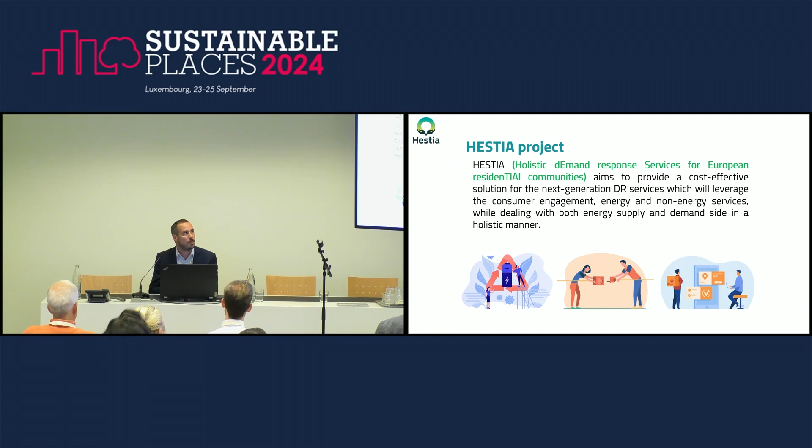I will speak about HESTIA, and I'm very glad to do it because it was a great consortium work. I think this was already discussed this morning, but HESTIA is an EU-funded project, and the aim of HESTIA was to develop solutions, in particular for demand response services, and in general solutions that are cost effective but also socially acceptable.

The 4 pillars from the beginning of HESTIA were to develop, as I said, a demand response cost-effective solution, because demand response, as Stefan said, is a revolution in the energy paradigm. Demand response means that each one of us in our household can contribute to the grid, to the stability of the grid, and to the energy world.

But it has to be cost-effective, because it's not an industrial cost. You have to have costs that are sustainable to develop solutions in each one of our households. The environmental impact, because all activities in HESTIA were done in order to promote the use of renewable energy, where possible PV plants, and in general to make a positive environmental impact, reducing energy consumption or shifting energy consumption in good time, depending on the nation, depending on regulation, depending on the grid status.

The economical benefits, because at the end, an economical benefit may be minimum, but has to be granted to make the change. And also demand response is a theme that is incentivized in these months and years all across Europe. So we have to check also, to start up this kind of activities, an economical benefit. And in general, the main economical benefit will be to reduce the energy consumption, even if it's not the only KPI to be seen, because it's important, but not all is the energy consumption from the grid.

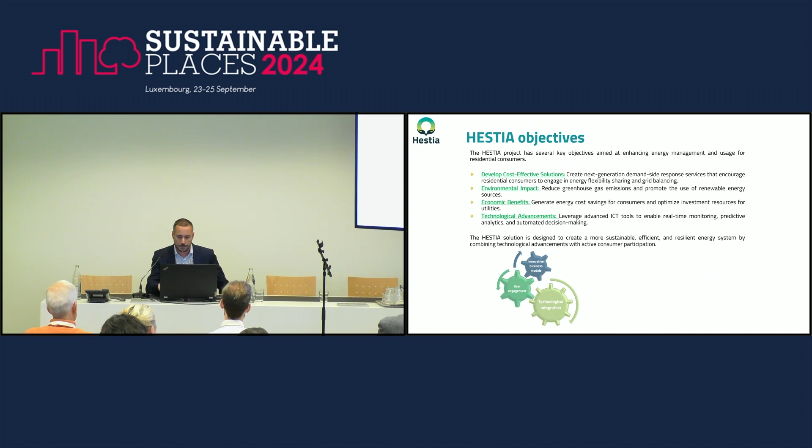As I said, the first part was to make an ICT integration, because we were a lot of members of the consortium, different technologies, different nations, so we had at first to equalize what was best in our solution, best in our nation, best in our technology, and then try to implement it depending on the pilot, depending on the case.

The user-centric approach: I don't want to speak too much, because this morning was very interesting about it, we should always have a user-centric approach. We tried to do it in HESTIA, but we could be more effective, it has to be said. All has to start from the user if we want to change the energy paradigm, as Stefan said. For this reason, there were 3 pilots in Italy, in France, and the Netherlands, and we started to engage the people in these 3 pilots in the early stage of the project.

Remuneration. The solution provided by HESTIA has a remuneration module, remuneration connected to the demand response actions that are central in this view. We have to say that it was tested in a theoretical way. The people were not physically remunerated, but the tool is ready, and in the Italian pilot it was tested.

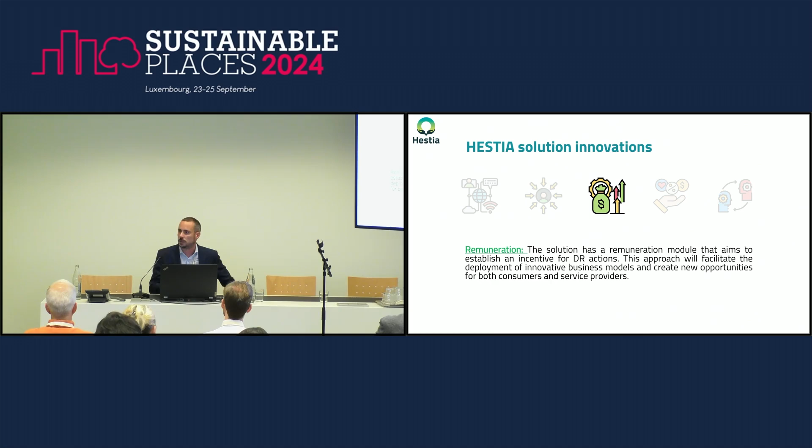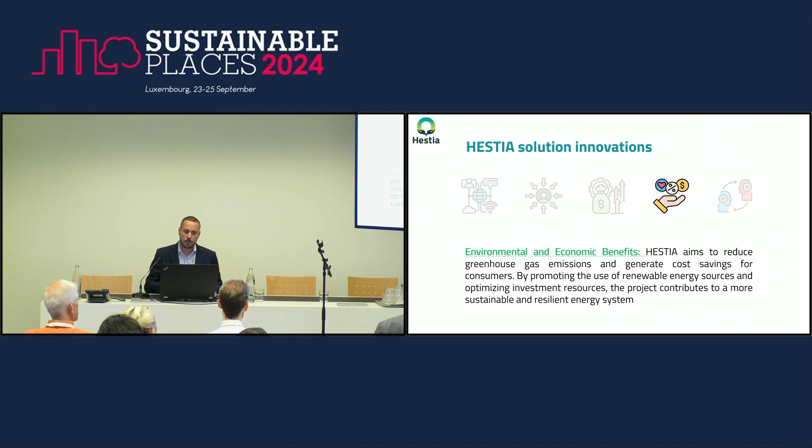About environmental and economic benefits, we can say that we promote the use of renewable energy, in particular PV plants. In many parts of the pilots they were already present, but not always well used, or there was no storage system. So we added the storage system, for example, in the Italian pilot. And so we can promote renewable energy and the conscious use of renewable energy, and in general, optimizing the consumption and the time of the consumption, we made incremental other environmental benefits.

One of the pillars of the project is to share these 2 worlds, the social and technological sides, and each one has to speak with the other to guarantee that this solution will be implemented or will be effective. So, as I said before, in the early stage of the project, people were involved. It was a little bit hard to keep people interested for years and years, because the HESTIA project had a forecasted length of 3 years, and will last 4 years because of the COVID period, which was very hard for pilot implementation. So it was very difficult and not always the best to keep the people engaged for 4 years.

About the pilots, as I said before, there was a pilot in Italy, in Berchidda. The municipality of Berchidda owns their distribution grid, so it was a little bit easier to develop demand response in this kind of sandbox. Camille Claudel in France, a big eco-district, with attention to shifting consumption out of the peak, the problem of the energy grid in France. So this was the main challenge of this pilot.

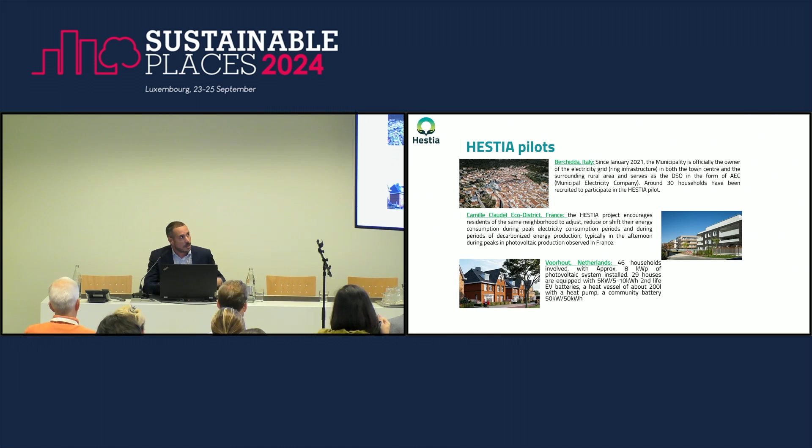And Voorhout in the Netherlands with second life battery storage, EV, electric vehicle batteries that were used for storage in the households, so a second life project. And also demand response arbitrage was thought about for this pilot. This is a graphical summary of HESTIA services.

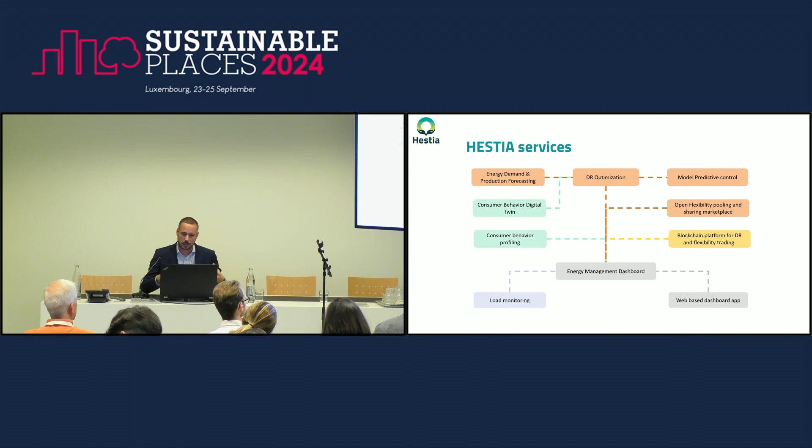As I said, a little bit more in depth, these are use cases. So what was really done in the pilot? In the Italian pilot, there was a shifting in electricity use to favorable moments and according to PV production, and also improved the management of the storage system that was manual, so it was not automatic, but it improved the sensibility of the people to use it in a more active way.

The Dutch pilot was used also to test the arbitrage, so basically to absorb from the grid in a certain period and to release in a more favorable period, and maximize the self-consumption in the Dutch pilot. Also, the French pilot, as I said before, was to shift the consumption out of the time frames that are very critical for the French grid.

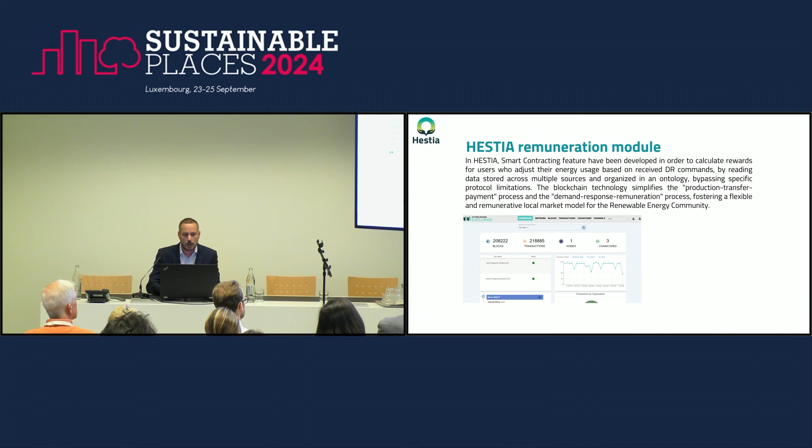Results. There were a lot of KPIs, but among the others, there was a 10% mean reduction in the consumption from the grid, more than 50% increase in self-consumption in the Italian pilot because of the storage system, as I said before, and more than 20% overall consumption reduction for the Dutch pilot, for the sensibility to have data and check our consumption.

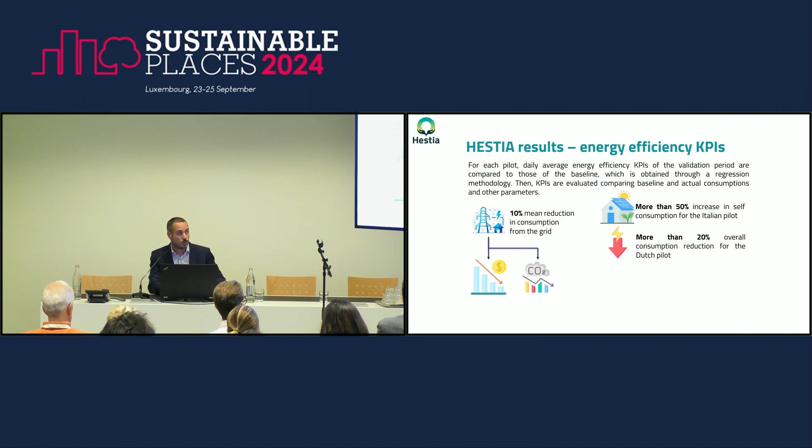Conclusions. In general, we can do some more. We can refine the model, refine the solution according to the feedback from the pilots and from the KPIs, which were a lot, 50. A lot of them are not calculable at this moment, so there is something else to be checked, but in the main KPIs, that are grid consumption, but not only this, the usage of the platform, the involvement of people, there is a lot of good feedback that will be implemented maybe in a future activity of the consortium after the conclusion of the EU-funded project.

Sorry. More than perfect, and you are right on time. You were very timely to say, okay, yes. Two minutes. I'm so sorry for that. The timekeeper, no, is a bad word. You have to. So maybe we will jump directly to a colleague from Sender, and like that, we will have the questions after the three presentations. So I will make some signs about the time sometimes.

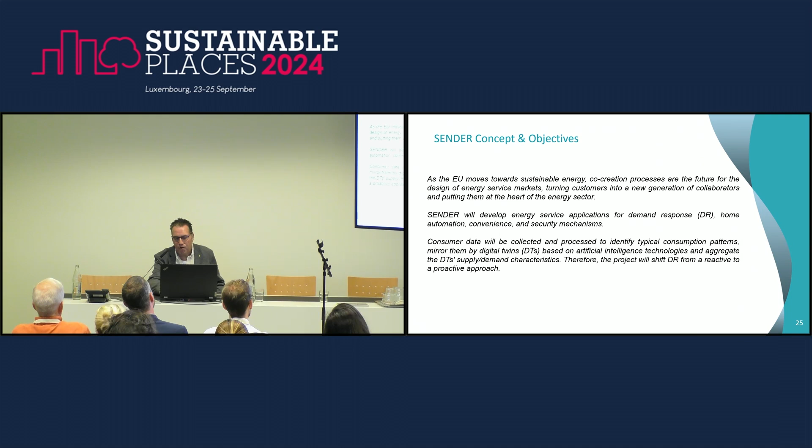However, the application was accepted, and we basically said we have a portfolio of technologies that we could implement, but the user will have the final say. So maybe that's just kind of introduction to the general project context. We have a wide European coverage with some 15 partners from 7 different European countries, and we have demonstration sites in Austria, Finland, and Spain.

If you look at the Sender system architecture, we follow certain reference architectures, and on the left-hand side we have the more consumer-centric approaches. On the right-hand side, the aggregator-related applications we can provide, and then in the lower side of the graph we outline certain technologies that we will use, like a hot water tank controller, home gateway, and so on.

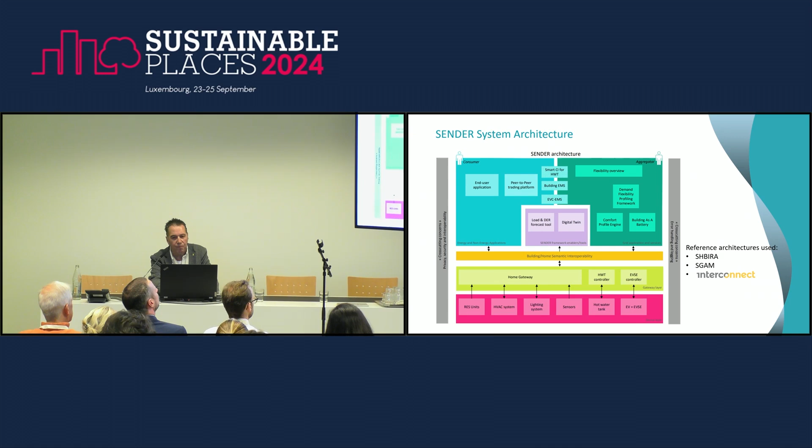And what I would like to do now is basically focus on the concrete technological implementations that we did, and that was on the one hand, consumer digital twin from our Greek partner Paragon, and they basically used this digital twin in the first step in the aeronautic industry, in order to forecast and also support the balancing of long-haul flights all over the world. And then they applied this kind of technology also to the Sender project to forecast the occupancy rate of buildings, which is quite an important input factor also for other technologies in the project.

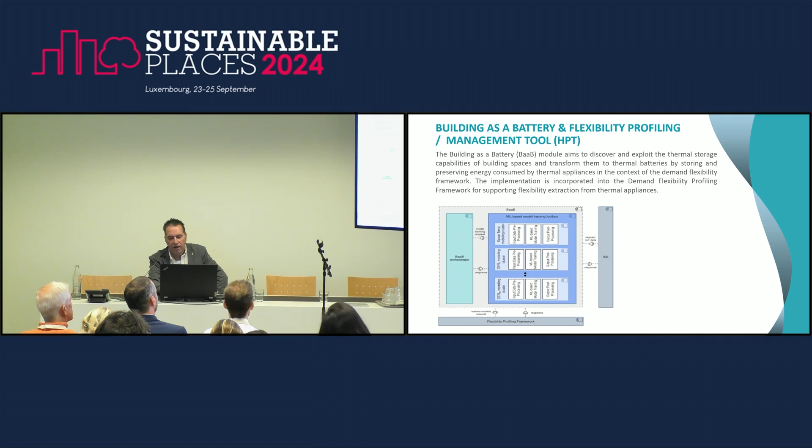And I think a third technology, which was very important for us in the project, is the so-called virtual lab and global integrated platform. So our experience before applying to Sender from other projects was that we try to implement technologies at the customer side, and then we understand there are interoperability issues of some solutions from different suppliers, and for that reason we said we first test everything.

We test the interoperability of all solutions in a virtual lab. If that works, we go into a so-called integrated platform, and once we are completely sure that we can implement a solution which is really working on the customer side, then we will go for it. And to have this kind of approach, we developed this virtual lab and global integrated platform with the Austrian Institute of Technology.

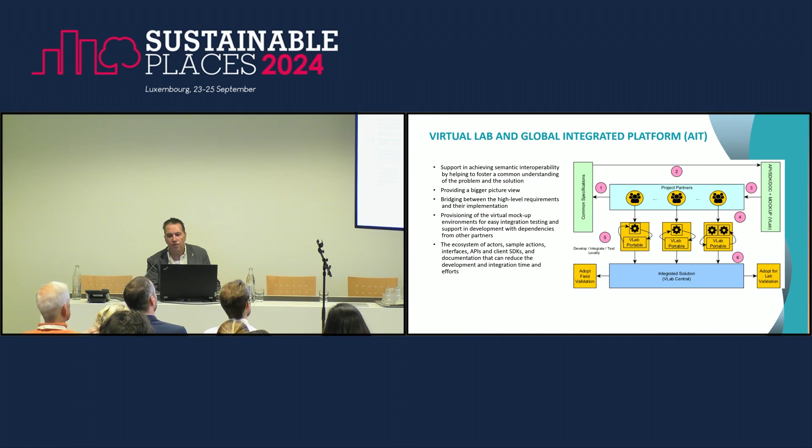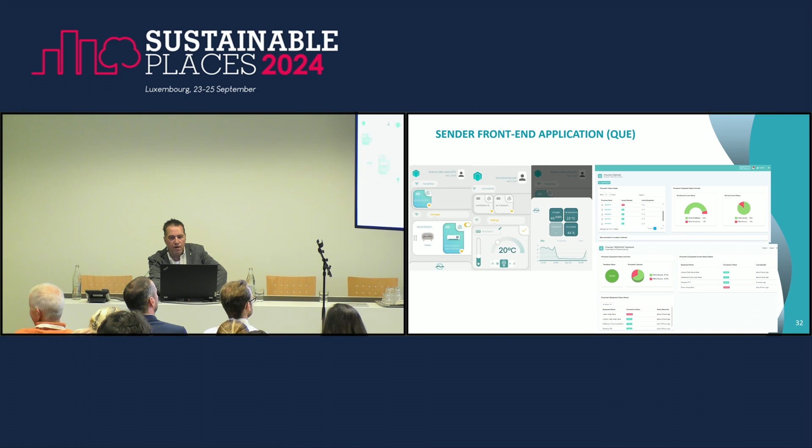Then, as probably every project in this area has, the front-end application, which gives the user very detailed input on his consumption characteristics, but also on room conditions at his site, and also the ability here to steer certain devices based on this front-end application.

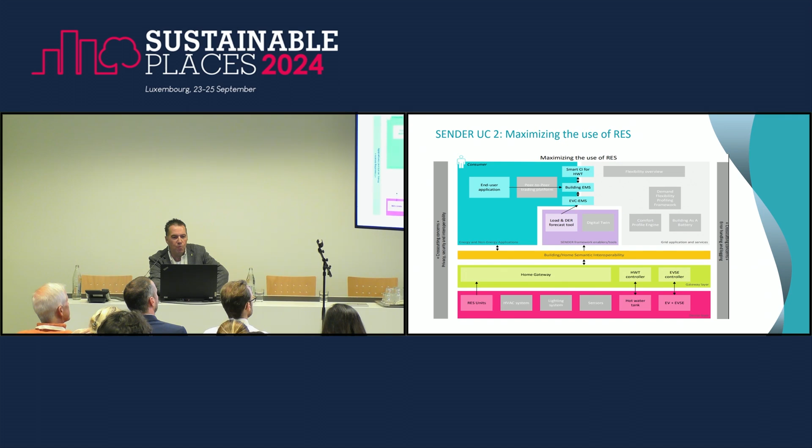If we look more at the left-hand side and the consumer part, we have on the one hand developed for the individual consumer a supply and demand forecasting tool that was done by CRS4 from Sardinia in Italy. And I think we have meanwhile some 3 or 4 academic publications on it. This model is also able to have a kind of disaggregated load forecast if you don't have individual measurement data for each of the components.

And the accuracy of this model is really excellent, and also a kind of scientific milestone and benchmark now in the academic discussion on supply and demand forecasting.

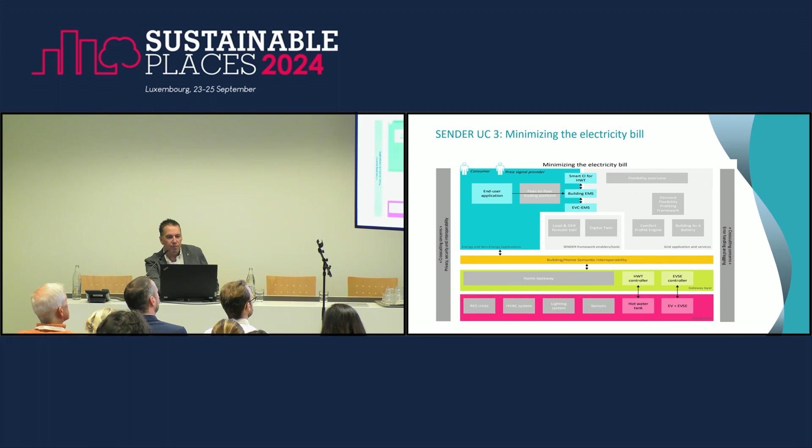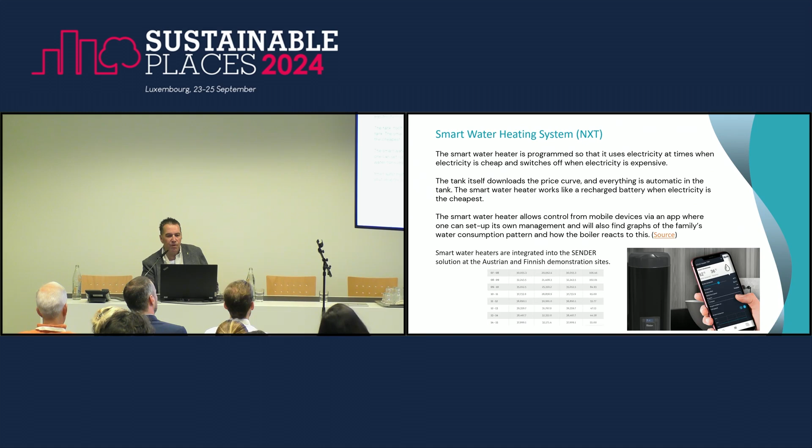And as I heard before in the presentation, also here a huge impact on the energy consumption based on these hot water tanks, because in many countries they are the main electricity consumption appliance in the building, and therefore, I think really impressive results that we saw in this area.

The smart charging EV energy management system from Trialog in France is applied at one demonstration site in Finland. And also here you see on the graphs on the right-hand side that based on this EV energy management system, we were able to have a much smoother load in the grid, and therefore also supported the DSO in Finland based on these smart charging solutions.

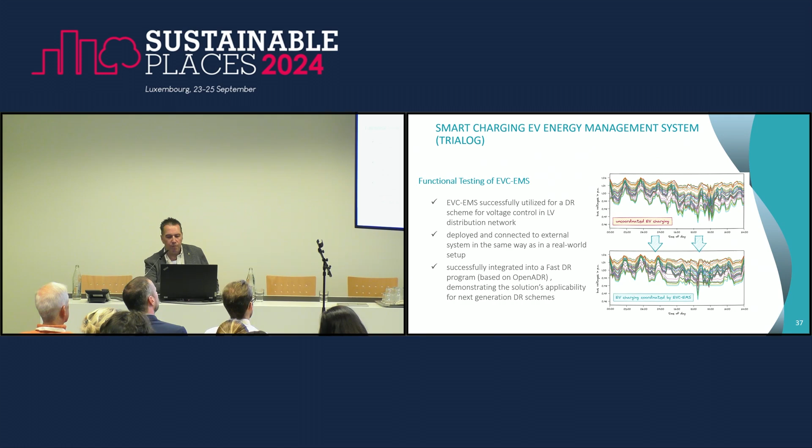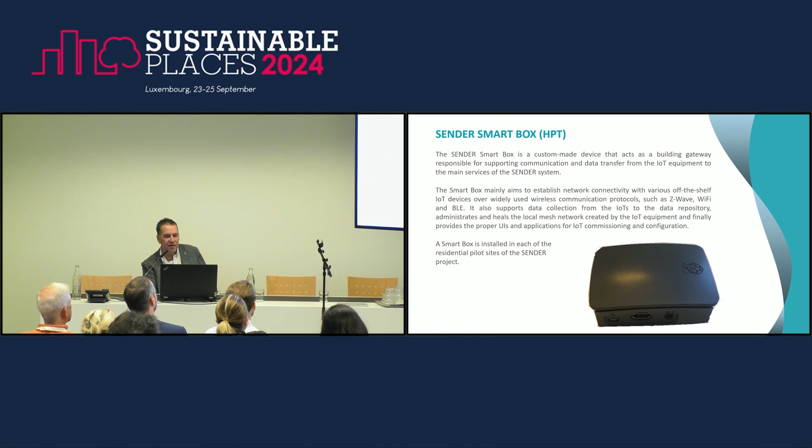And I think the final part that we developed for the consumer is basically the Sender smart box. So that's basically the component where all the information from a household runs together, where the tech providers can access the data. And maybe interesting side remark, when we installed it in Finland, many customers were a bit embarrassed because it's black and everything else in the house is white. So that does not really fit into the interior design, but still the technology functionality is given, and therefore each user in the Sender project has this kind of smart box in the building to run all the Sender technologies.

1 minute. Sorry for that.

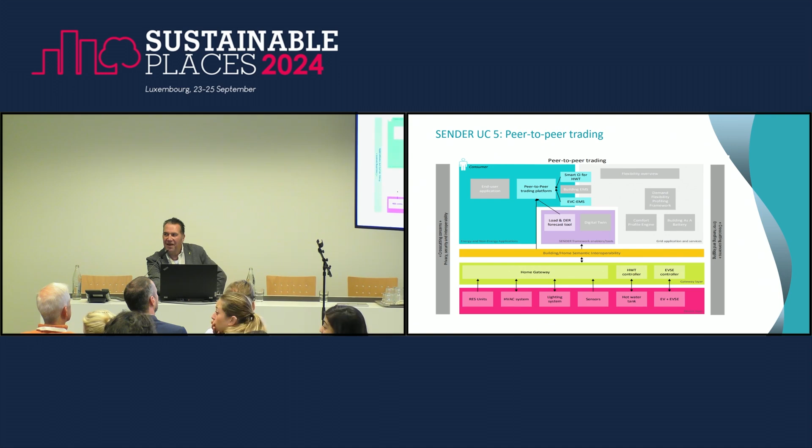Aniol talked about the peer-to-peer trading system, and we did not actively apply it in the project because the regulatory environment and the restrictions were too hard to implement it. However, there is a GitHub site, and we further developed the technology solution, and therefore the basic code and the peer-to-peer trading solution from NTNU in Norway is further developed, and it's basically available on a special GitHub site without any restrictions. So if you want to use something like that as a base for other projects, that's, I think, perfectly fine.

Finally, just 4 remarks. What kind of challenges and lessons learned did we have? On the one hand, the COVID challenge. Core problem for us, there were very motivated customers, and then they are waiting for a year or a year and a half for an implementation. So it was quite challenging to keep these activated customers engaged, motivated, and we tried to use some Miro boards in order to have a kind of other non-social interaction with them.

Then, as Aniol also said, the tech supply shortages, on the one hand, the Raspberries and also other components which became first much more expensive, and then the delivery times were much longer than expected, and therefore we also had to face a project implementation delay due to these external factors.

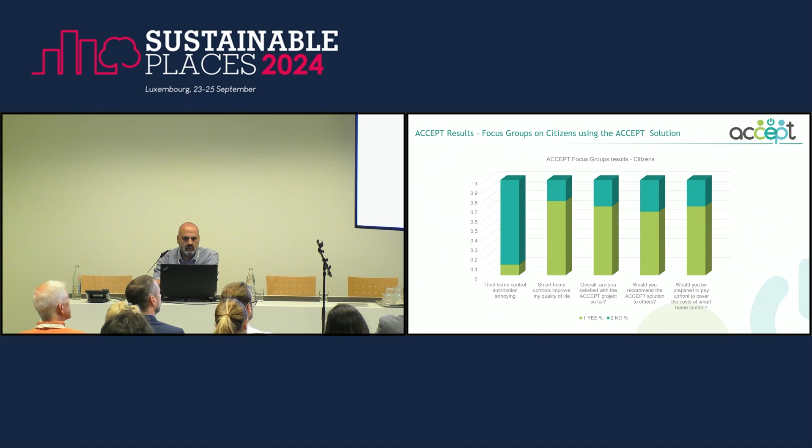Coming back to the discussion of the previous session, end users were, let's say, quite happy. Not everybody was rooting for this, but we didn't get too much pushback. So we are happy with that. And there are also some lessons learned, but there's not much time for this. I think most of these were covered by the previous presentation by our colleagues explaining the user engagement story. But basically the idea is we have to talk to users a lot.

You have to keep them in the loop very closely. You have to be very flexible. Things go wrong, and there's very limited time to get them right again. And you need to fine-tune everything every time: 4 different pilots, 4 different cases, 4 different approaches, socially, culturally, infrastructure, and so on. So there's no methodology that suits everything. So we have to be adaptive.